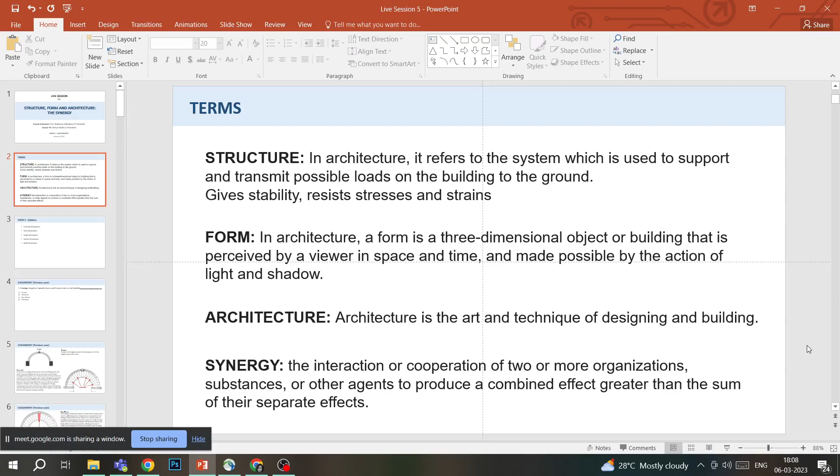So in week 5, the syllabus covered included frame structures, arch structures, vault structures, and dome structures.

Lecture number 21 was on frame structures. In this lecture, firstly the definition and introduction of frame structures was given. A frame structure is basically a combination of structural components like beam, column, and others, connected together to resist gravity and different lateral loads.

Then it was discussed how load is transferred in frame structures. Some examples were shown along with the kinds of materials used, such as RCC, steel, and composite. Then the different types of frame structures were discussed—mainly 2 types: rigid frame structure and braced frame structure. Examples were discussed, along with types of rigid and braced frame structures, and the advantages and disadvantages of each.

Moving on to lecture number 22, arch structures. The definition and introduction of arch were given: an arch is a curved structural form, it carries compressive load, and it is self-supporting. Then elements of arches were discussed, how load is transferred in arches, what materials are used to make arches, and examples from around the world, followed by the different types of arches.

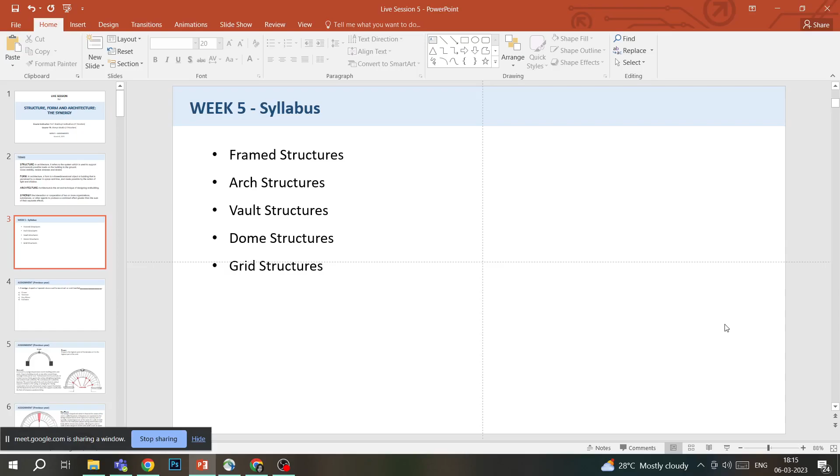And now we will start with our questions. So these are previous year questions, these are not this year questions. And we will start now. A wedge-shaped or tapered stone used to construct an arch is called crown, voussoir, keystone, or extrados. So these 4 terms, if you have studied the lecture, you would be familiar with these terms. If you've not, we'll just discuss these terms a little so that you can understand what these terms are and be able to answer this question.

So, what is a crown? A crown is basically the highest point of the extrados, or it is the highest part of the arch. So extrados here means the outer surface of an arch. Whenever there is an arch, it would be made of some material, and there would be two curvatures, one inside curvature and one outside curvature. So the outside curvature is called extrados, and in that extrados, the highest point is called crown.

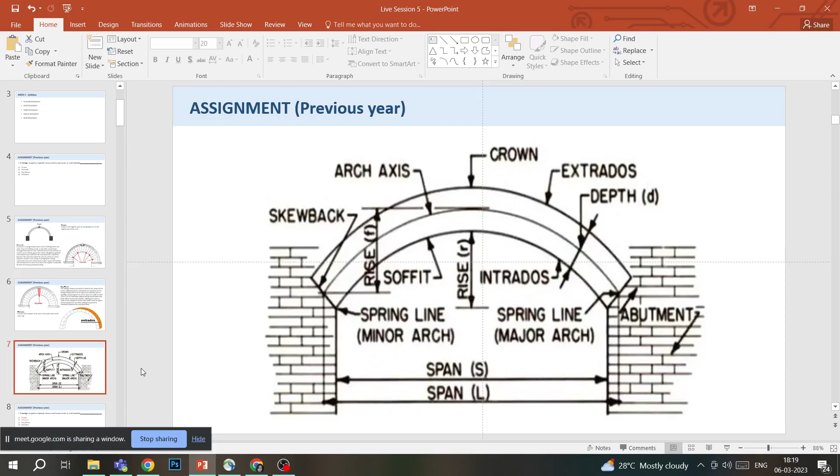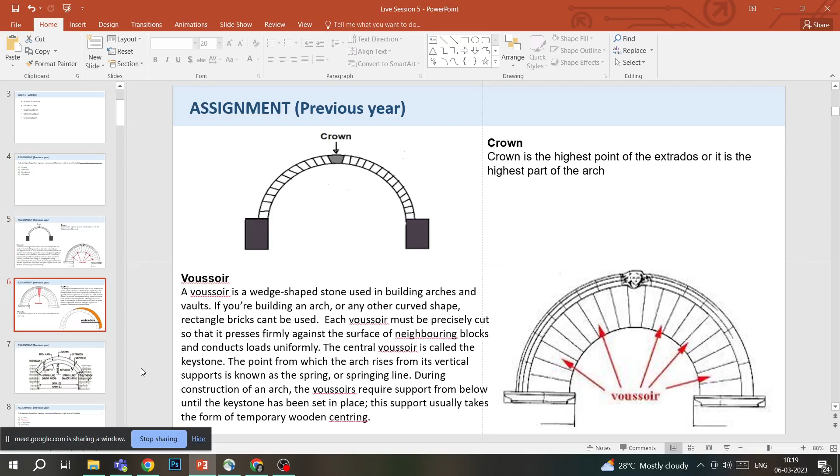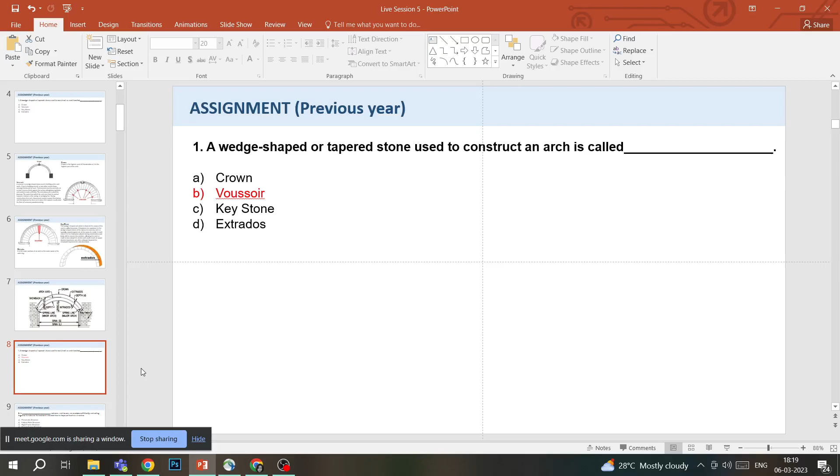So our question was, a wedge-shaped or tapered stone used to construct an arch is called, and as we just discussed all the four terms, the correct answer would be voussoir. All the wedge-shaped stones that are used in constructing an arch or a vault are called voussoirs. Keystone is the apex voussoir, center voussoir, and the voussoirs that are on both edges, sitting on the abutment, are called springers.

Moving forward, question number 2. In blank, columns and beams are made monolithically and act together to tolerate the moments created due to imposed load on the structure. And the four options that have been given are pneumatic structure, folded plate structure, rigid frame structure, and braced frame structure.

So pneumatic structure is a membrane structure that is stabilized by the pressure of compressed air. Pneumatic structures are characterized by slightly higher pressure of internal air above the outside pressure. These structures are supported by pressurized air within the inflated building elements that are shaped to carry loads in a traditional manner. The roof membrane of the pneumatic structure is made from rubber or reinforced film and ETFE foils sometimes, using industrial fabrics coated with polymers.

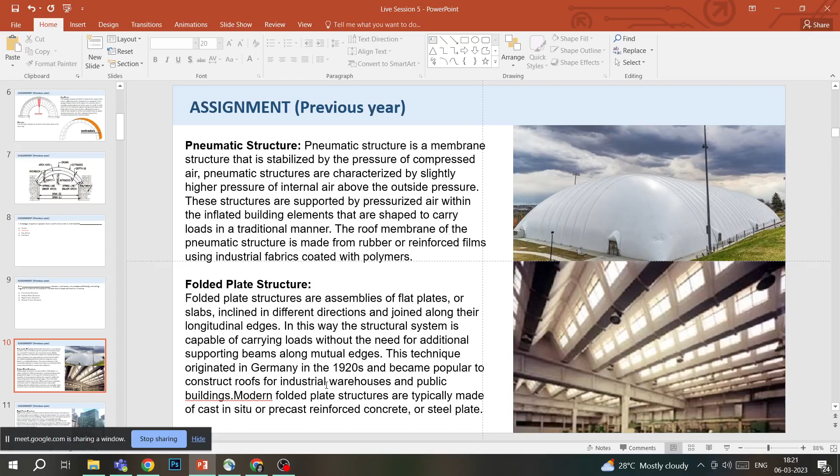Folded plate structure. Folded plate structures are assemblies of flat plates or slabs, and they are inclined in different directions, and then they are joined together along their longitudinal edges. In this way, the structural system is capable of carrying loads without the need for additional supporting beams along the mutual edges. This technique originated in Germany in the 1920s, and it has become quite popular, and it is being used to construct roofs for industrial warehouses and public buildings. And modern folded plate building structures are typically made of cast in situ or precast reinforced concrete or steel plates.

Rigid frame structure and braced frame structure. Rigid frame structure consists of linear elements like beams, columns, and the word rigid basically means the ability to resist the deformation. It is used in steel and reinforced concrete buildings. Rigid frames are characterized by the lack of pinned joints within the frame and are typically statically indeterminate. A rigid frame is capable of resisting both vertical and lateral loads by bending of beams and columns. And stiffness of the rigid frame is provided mainly by the bending rigidity of beams and columns that have rigid connections.

A braced frame structure. Braced frame structures are composed of beams and columns that are pin connected with bracing to resist lateral loads. So how is braced frame different than rigid frame? Rigid frame has no pin structures, while braced frame has pin structures; the columns and beams are pinned together with a bracing to resist the lateral loads. The resistance of lateral forces is obtained through both horizontal and vertical bracing.

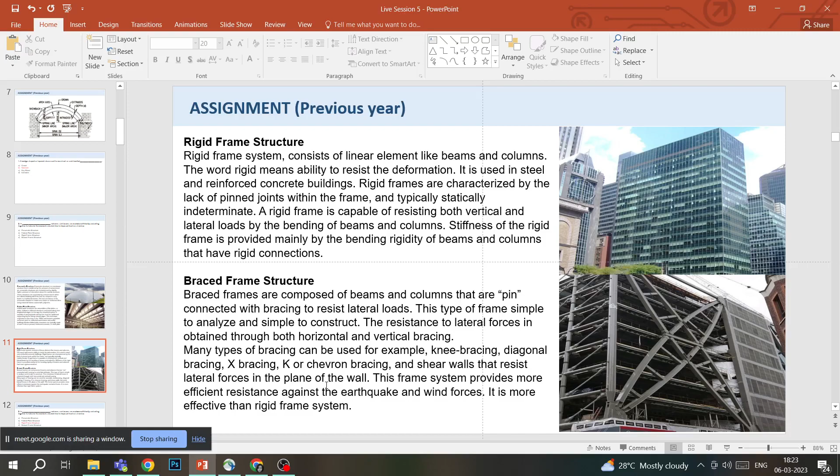So going back, our question was: in dash, columns and beams are made monolithically and acting together to tolerate the moments created due to the imposed load on structure. So pneumatic structure, as we have understood, works with the idea of compressed air, how the air is keeping the structure floated. So it is not pneumatic. Folded plate, we just learned that different plates are put together at an angle, so it is not that. And then we learned that in rigid frame, everything is fixed, everything is rigid, and in braced frame the column and beam joints are braced together and they're kind of pinned together. It is not a fixed joint. So our answer would be rigid frame.

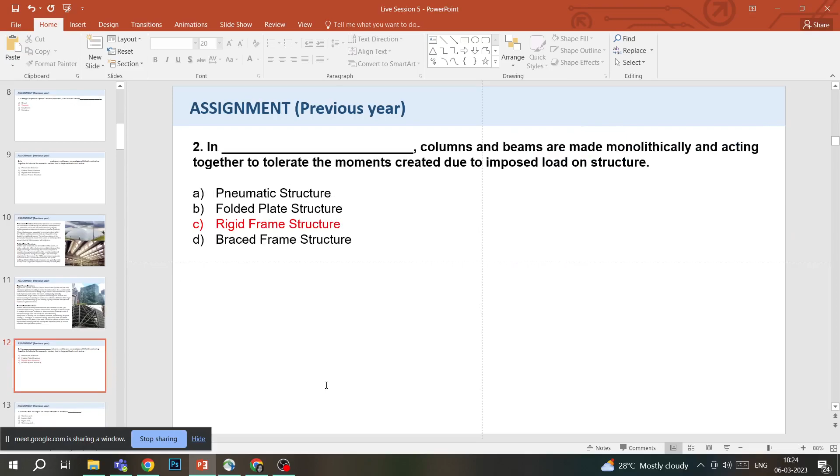Next question. An arch with a straight horizontal extrados is called as camber arch, lancet arch, ogee arch, or catenary arch. I'm not sure which is the correct pronunciation of ogee. So as we just learned in the first question, extrados is basically the outer curved surface of an arch. And now they are saying an arch with a straight horizontal extrados. This arch has a straight extrados, which means that it's an arch, but it's almost straight. It is not completely curved. It's a very slight curve. That's why it is called horizontal extrados. Now we will learn what all these four arches are to be able to answer this question.

Camber arch. Camber arch is an arch whose intrados, though apparently straight, has a slightly concave curve upward. So in camber arch the extrados is completely straight and the intrados is a very slight curve, almost straight but a very slight curve.

Lancet arch. So the lancet arch is a variety of pointed arch in which each of the arcs or curves of the arch have a radius longer than the width of the arch. So do you understand what that means? So basically they're saying that all arches that we draw, when you're constructing those arches, when you're preparing drawings of these arches, we all know they're made out of curves, different kinds of curves.

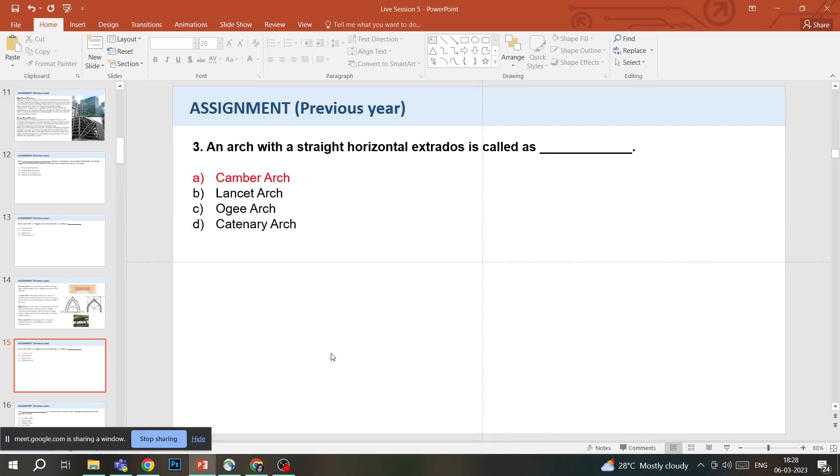Moving on to the next question. A dash is a continuous arched shape that may approximate a semi-cylinder in form. Annular vault, barrel vault, Catalan vault, and fan vault. So we will learn about all these types of vaults. Before we do that, the question asks that this kind of vault is a continuous arch shape that may look like a semi-cylinder in form.

So moving forward, annular vault is a barrel vault. So first we will discuss barrel vault so that we can understand annular vault. So barrel vault is a continuous arch shape that may approximate a semi-cylinder in form, resembling the roof of a tunnel, or may be pointed at its apex.

It is typically formed by a series of arches, and barrel vaults must be able to withstand the outward pressure on the lower parts of the vault imposed by the structure above. So barrel vaults are basically different arches placed in distance, and it creates a semi-cylindrical form.

And in an annular vault, it is a barrel vault but in the shape of a ring. So a barrel vault is basically different arches that are placed one after the other, and it creates a semi-cylinder kind of shape, but it is straight. And when that barrel vault is curved or it is a part of a ring, then it is called an annular vault. And I have shown you the example of both these vaults.

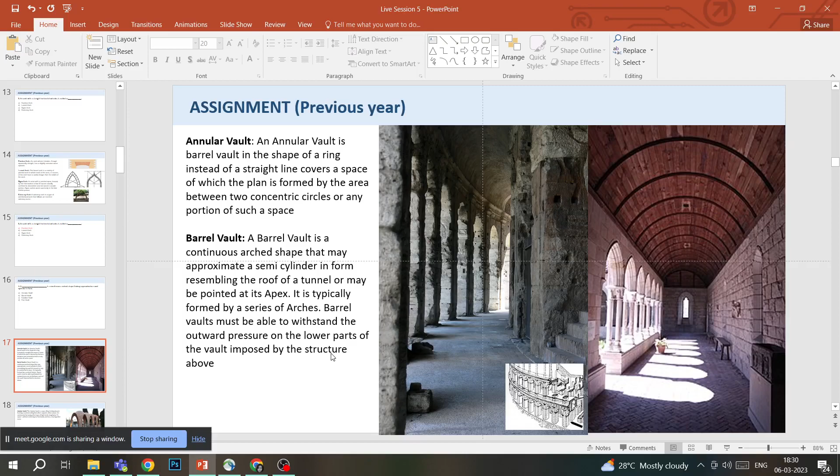For example, for this annular vault, a good example would be your Colosseum. So there is a tiny diagram over there in the first image, if you can see. So yeah, because the Colosseum is round shaped, it has annular vaults in it.

Catalan vault. So a Catalan vault is a type of low brickwork arch forming a vaulted ceiling that often supports a floor above. It is constructed by layering a first layer of light bricks lengthwise in space without centering nor formwork, and has a much gentler curve. It is basically a type of low brickwork arch forming a vaulted ceiling, and it usually supports the floor above.

Fan vault is formed by a series of concave sections or ribs that spread out from a series of spring points. The ribs of a fan vault are of equal curvature and rotated at equal distances around a central axis, and it was mostly used in Gothic architecture. So the answer is barrel vault.

Question number 5. The vault type used in the Great Mosque of Cordoba is barrel vault, cloister vault, rampant vault, rib vault. First we will learn what the Great Mosque of Cordoba looks like, and then we will learn all these 4 types of vaults, and then we can answer this question.

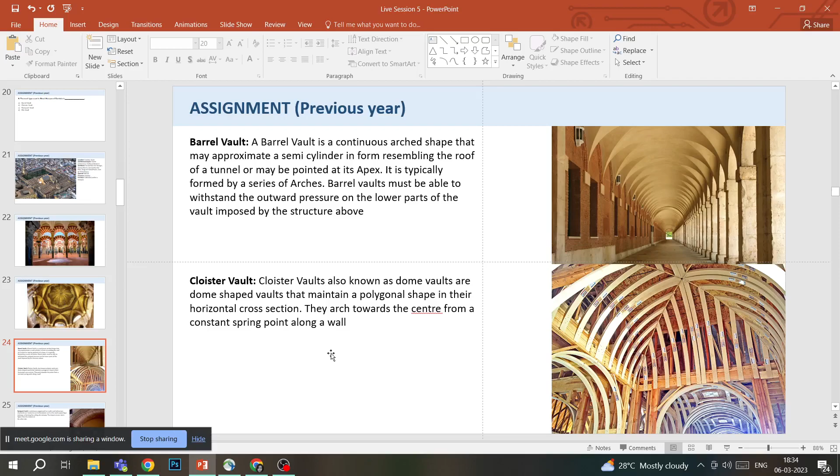Rampant vault. A rampant vault is a continuous wagon vault or cradle vault, whose two abutments are located on an inclined plane, such as the vault supporting a stairway or forming the ceiling of a stairway. The impost on one side is higher than the impost on the other side. So in a rampant vault, the two abutments are located on an inclined plane. For example, in a normal arch, the two abutments are in the same plane, but in a rampant vault, they are in different planes, which makes the arch form like a cradle, slightly elliptical in shape, usually used for supporting a stairway or forming the ceiling of a stairway.

Ribbed vault, or rib vault, is an architectural feature for covering a wide space, such as a church nave, composed of a framework. A church nave basically means that typical churches constructed have 3 rectangles in them. The central rectangle is called the nave, and there is a series of columns on each side, with two more corridor-like spaces after the columns, called aisles. So the central aisle is basically called the nave, and the rib vault is used for covering a wide space such as the church nave.

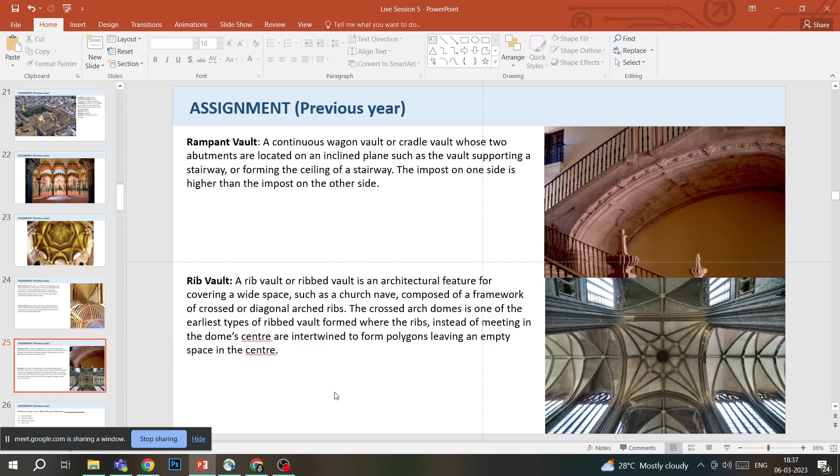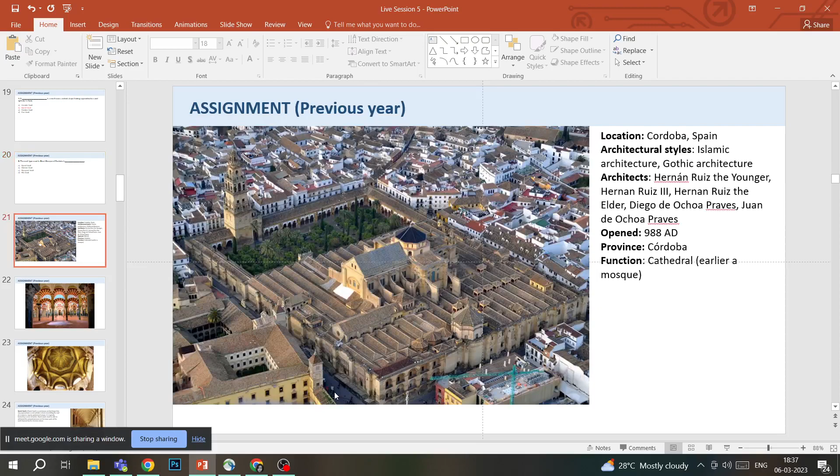So our question was: how do the arches of the Great Mosque of Cordoba look? Barrel vault, cloister vault, rampant vault, or ribbed vault? Looking at this image, you can see it is not a barrel vault, not a typical cloister vault, and not a rampant vault either. It is in fact a ribbed vault, because you can see different ribs coming out and forming polygons, leaving some space in the center, like the definition says. So the correct answer would be rib or ribbed vault.

Number 6: a dash is any building with a circular ground plan covered by a dome. The options are coffer, rotunda, squinch, and pendentive. We will learn what all these terms mean, and then we will be able to answer this question by understanding all four terms.

A coffer in architecture is a series of sunken panels in the shape of a square, rectangle, or octagon in a ceiling, soffit, or vault. It is basically a grid structure of sunken panels, which can be straight or curved.

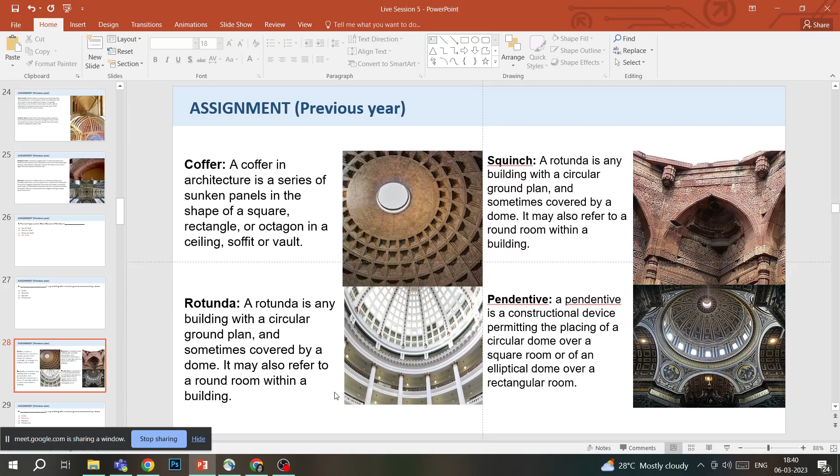So the correct answer is rotunda. Rotunda is any building with a circular ground plan covered by a dome. The biggest and most famous example of a rotunda is the Pantheon in Rome, which is a circular building with a dome over it, also has an oculus over it, and the dome has a coffered ceiling. So this is a big example of rotunda. Another famous rotunda is the Capitol complex in the US.

Moving on to the next question. Metropol Parasol in Spain is an appropriate example of: grid structure, arch structure, cable suspended tensile structure, or pneumatic structure. We will first see how Metropol Parasol looks like, learn some little facts about the building, and then see what all these kinds of structures mean and how they look like, and then solve this question.

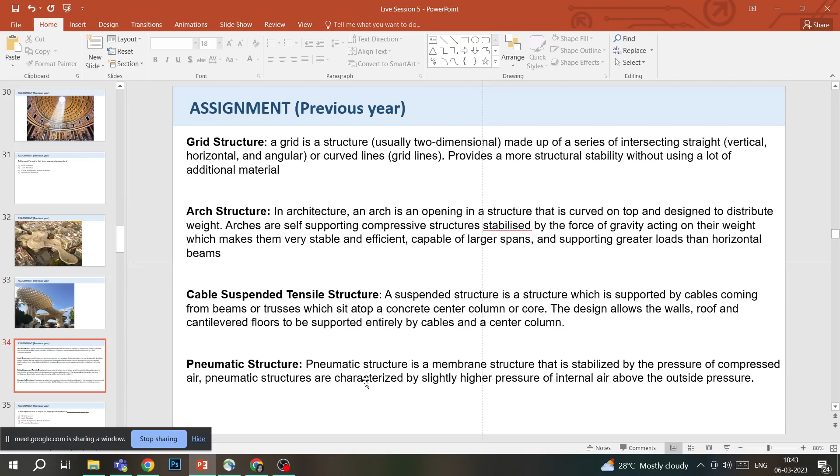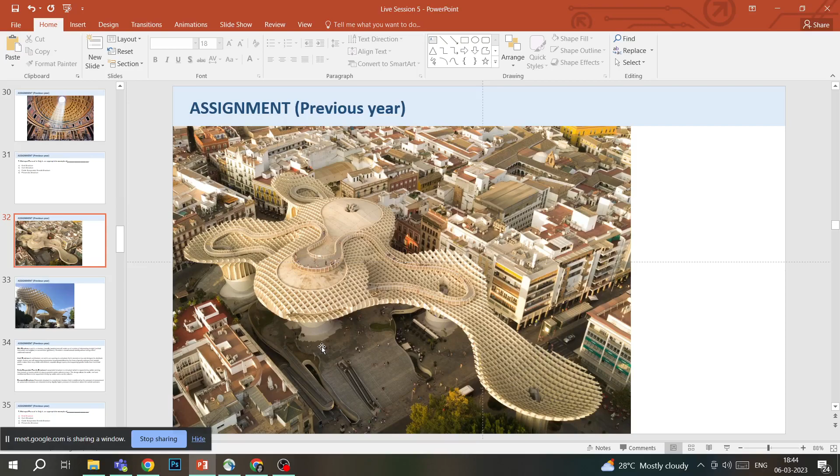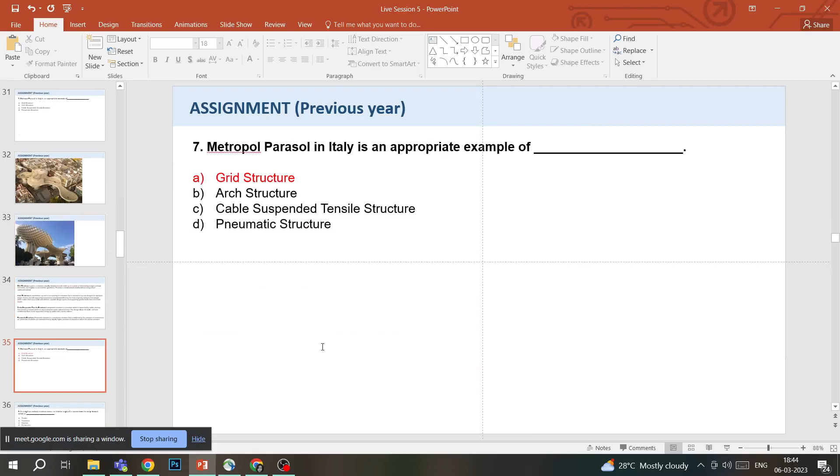So the question was how Metropol Parasol is an appropriate example of what type of structure. It's not an arch—if you can see, it's a curved structure, but it's not an arch. It is not a cable suspended tensile structure, and it is also not a pneumatic structure. As is very evident from the image, this is a grid structure—a curved grid structure, but still a grid structure. So our correct answer would be A, grid structure.

Question number 8: A straight or arch structure across an interior angle of a square tower to carry a dome is called as: oculus, tholobate, squinch, or pendentive.

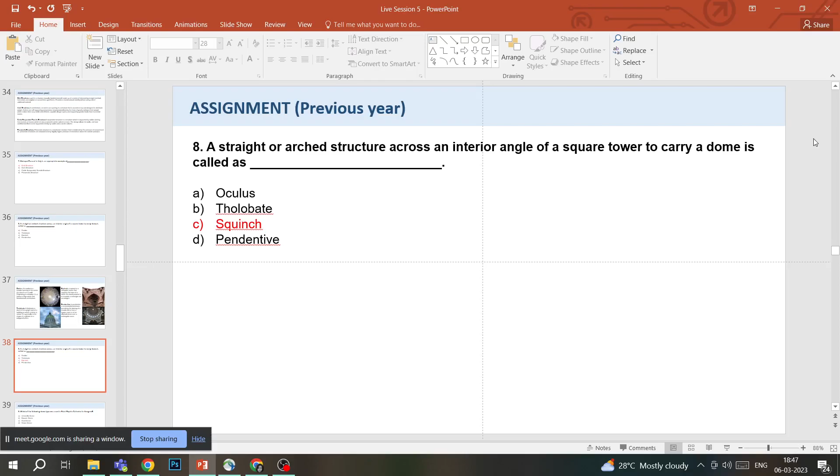Which of the following dome type was used in Saint Sophia Cathedral in Novgorod? Umbrella dome, saucer dome, oval dome, onion dome. First, we will learn a little about Saint Sophia Cathedral in Novgorod, and then we will learn how all these four domes look, and then we will answer this question.

It is a cathedral type structure, located in Kremlin Park, Novgorod Oblast, Russia. The architectural style is the architecture of Russia. It was opened in 1050 AD. Height is 38 meters, and there are 5 domes in this structure.

So the 4 types of domes mentioned in the question are umbrella dome, saucer dome, oval dome, and onion dome. We will just quickly see how all these 4 domes look.

Umbrella dome, also known as a ribbed dome, parachute dome, or scalloped dome. These kinds of domes are basically divided into curved segments that follow the elevation's curve. Radial lines of structure that act as the dome's ribs extend down the springing from the apex.

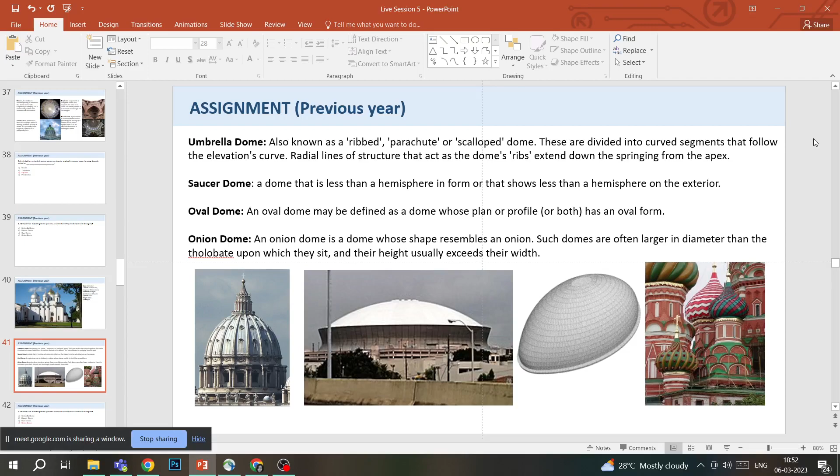Now going back to our question - which of the following dome type was used in Saint Sophia Cathedral in Novgorod. If you see this image clearly, you can see it's not an umbrella dome, it's not a saucer dome, it's not an oval dome - it is clearly an onion dome. So the answer would be onion dome.

So to be able to answer these kinds of questions, you have to be aware of how the buildings look, what their important features are, because only then would you be able to answer these questions if you know how these famous buildings look, what prominent features they have. If you know how they look, it would be easier to answer, because not always will a picture be given with a question.

Moving on. Which of the following buildings used diagrid structure for its construction? Burj Al Arab, Swiss Re 30 St Mary Axe, also called Gherkin. Gherkin is basically a name for pickles, cucumber pickles, and those pickles are elliptical or oval in shape, and the tower looks like that. That's why it's called a gherkin.

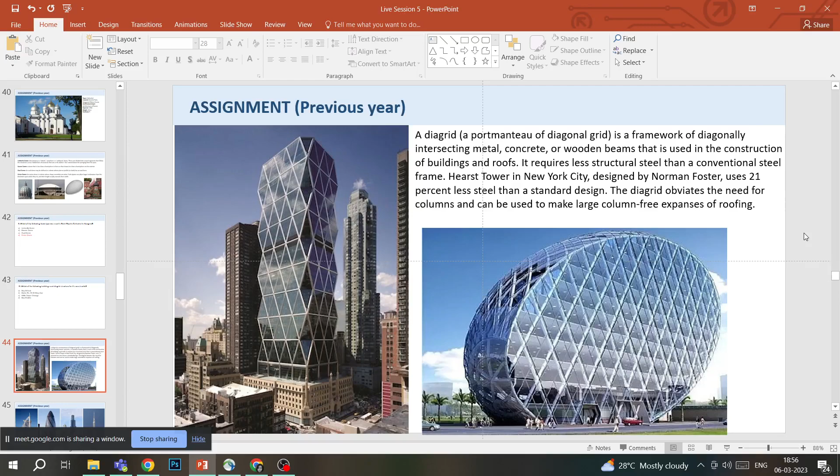So our question was, which of the following buildings uses diagrid structure for its construction, and four examples are given. Now we will see the four examples. Burj Al Arab, located in Dubai, is a very famous building there. Swiss Re 30 St Mary Axe, called Gherkin, is located in London. Willis Tower is located in Chicago, and Burj Khalifa is again in Dubai.

Actually, Burj Khalifa and Willis Tower use a bundled structure, and Burj Al Arab, if I'm not wrong, uses a braced structure because they have huge diagonal bracing in the structure. It is very evident that the Gherkin, the Swiss Re 30 St Mary Axe, is using a curved diagrid structure. So the correct answer would be B, Swiss Re 30 St Mary Axe, commonly called Gherkin.

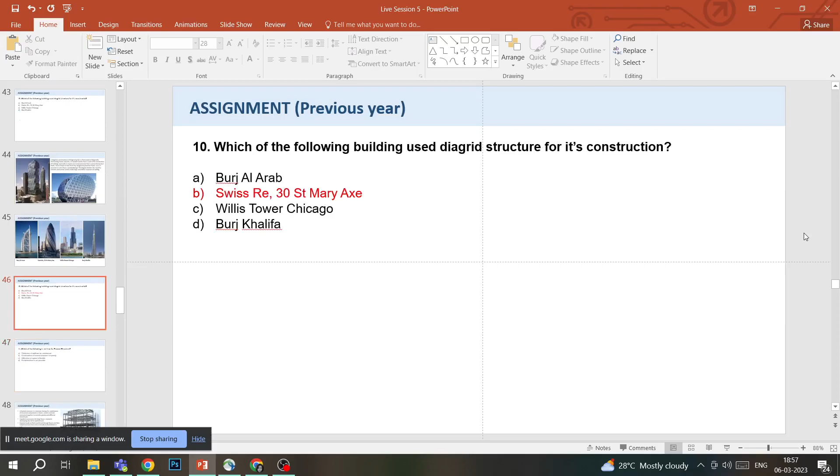Moving on to the next question. Which of the following is not true for frame structure? Thickness of wall can be maintained. Construction of framed structure is speedy. Utilization of space is flexible. Prefabrication is not possible. So the question is asking which of the following is not true for frame structure.

So we have to pick the sentence that is not true for a frame structure. We'll understand what a frame structure is a little here. It is a structure having the combination of structural components - beam, column, slab - connected together to resist gravity and different lateral loads. It is capable of overcoming large forces and moments developing due to applied loads. Imposed loads on the slab are transferred through the beam and then column to the lower floor and eventually to the foundation, to the soil. That's how load is transferred in frame structure.

So what happens in a frame structure is basically it's a very regular structure having a beam, column, and slab. It's a frame structure. We have framing and then we have the walls. It's not a load bearing structure, it's a framed structure.

The thickness of wall can be maintained uniform throughout, and a considerably thinner wall reduces dead load. Due to simple geometry, consisting of beam and column, construction of frame structure is speedy, and construction is speedy because the geometry is very simple. It has basic column and beam, in a very typical traditional form, so the construction is very speedy.

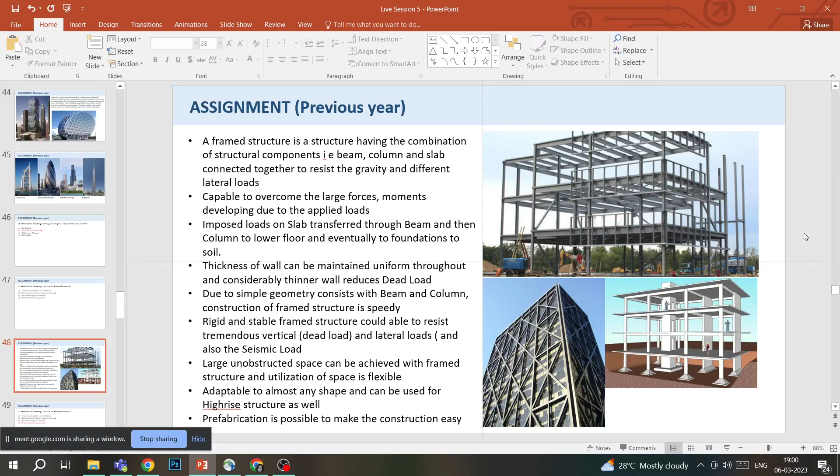So these are some of the facts about a framed structure. The question says, which of the following is not true for framed structure? Thickness of wall can be maintained, which is true. We can pick any kind of thickness of wall, and we also have the option of having thin walls, which reduces the dead load. Construction is speedy, which we just learned is true because framed structures have simple geometry, making them a little easier to construct.

Utilization of space is flexible. Yes, this is also true because we just learned that we can create large, column-free spaces with the help of a frame structure, which helps in making the space more flexible and utilized in a better way. So this statement is also true. Prefabrication is not possible - this statement is not true, because we just learned that prefabrication is also possible in frame structures, and it makes construction very speedy and easy. So the correct answer would be prefabrication is not possible, option D.

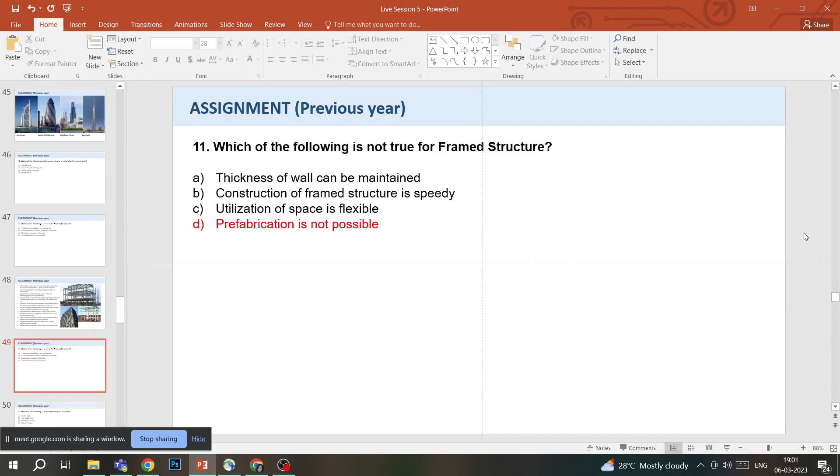Moving on to the next question. Which of the following is an example of grid structure? Coffer slab, funicular arch, geodesic dome, and space frame. We will see what all these four terms are, and we already know what a grid structure is.

A grid structure is basically any kind of structure which has intersecting lines. The lines can be straight, the lines can be curved, the lines can be in horizontal, vertical, or angular directions. So we will just see what these four types are.

Coffer slab: a coffered slab is a ribbed structure with reinforced ribs in the lower zone which have a mutually perpendicular arrangement.

Funicular arch: funicular structures include parabolic arches, tunnel vaults, and domes. They act in pure compression and have a rise-to-span ratio ranging from 1:10 to 1:2. Rise to span means the highest point of the arch compared to the width of the arch, which is the span - the ratio could vary from 1:10 to 1:2. Other kinds of funicular structures are parabolic arches, tunnel vaults, and domes, which act in pure compression.

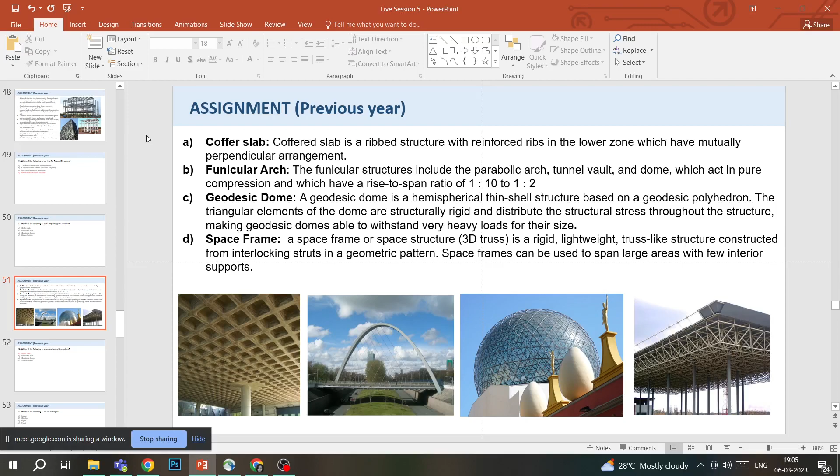I will have to confirm this, and I will research it a little and clear it out in the next session. Meanwhile, the correct answer is coffer slab - it is a grid ribbed structure.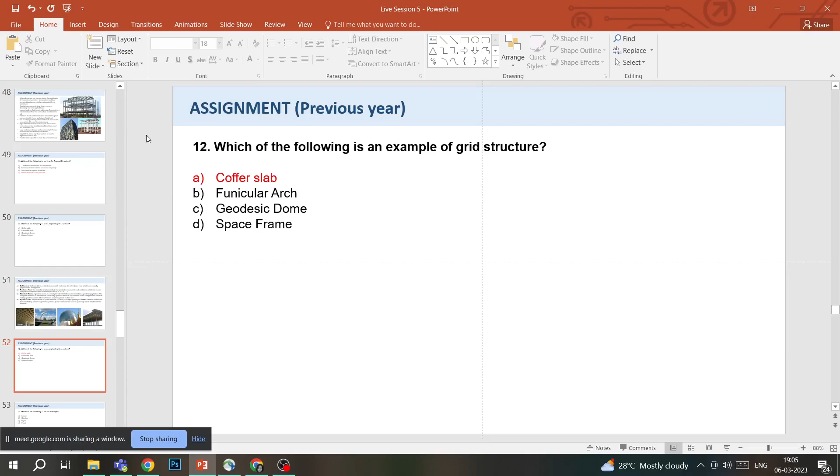Camber arch is an arch whose intrados, though apparently straight, has a slightly concave curve upward, and the extrados in a camber arch is completely straight. So the question is basically which of these following is not an arch type. And then lancet is also an arch, and I have just discussed all these arches.

The lancet arch is a variety of pointed arch in which each of the arcs or curves of the arch have a radius longer than the width of the arch. Ogee arch will have a pointed apex formed by the intersection of two S curves, usually confined to decoration and not used in arcade arches. Ogee arches were used only in the late Gothic period.

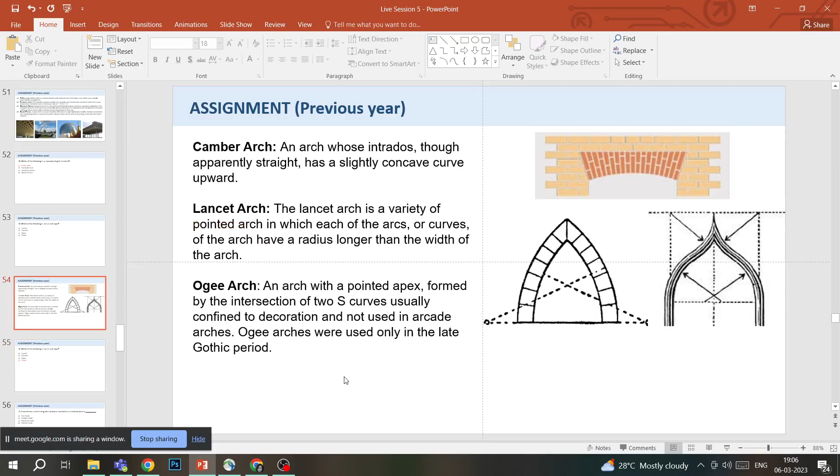And focal points are basically where the curves of the arches originate. So of course focal is not an arch, another three are arches. So the correct answer is focal.

Question number 14. A continuous vault having two abutments located on an inclined plane is fan vault, Catalan vault, rampant vault, cloister vault. So, Catalan vault is a type of low brickwork arch forming a vaulted ceiling that often supports a floor above. It is constructed by layering a first layer of light brick lengthwise in space without centering or formwork and has a much gentler curve.

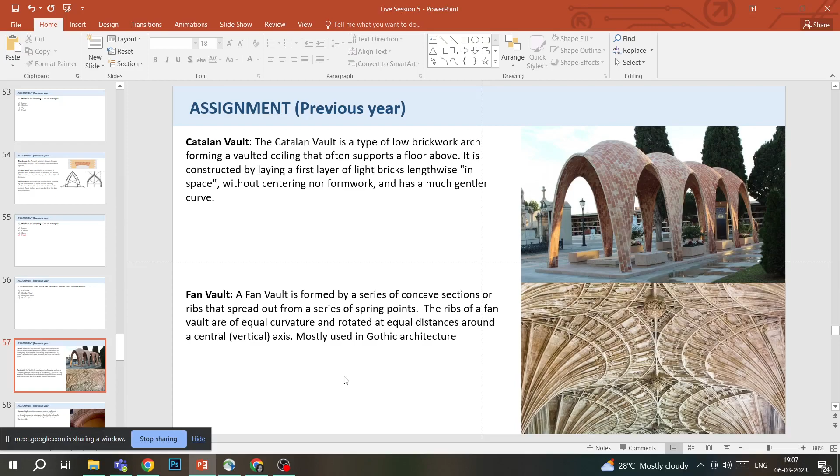A fan vault is formed by a series of concave sections or ribs that spread out from a series of spring points. The ribs of a fan vault are of equal curvature and rotated at equal distances around a central axis. It is mostly used in Gothic architecture.

Rampant vault is also called a wagon vault or a cradle vault, and the two abutments are located on an inclined plane, such as the vault supporting a stairway or forming the ceiling of a stairway. The impost on one side is higher than the impost on the other side.

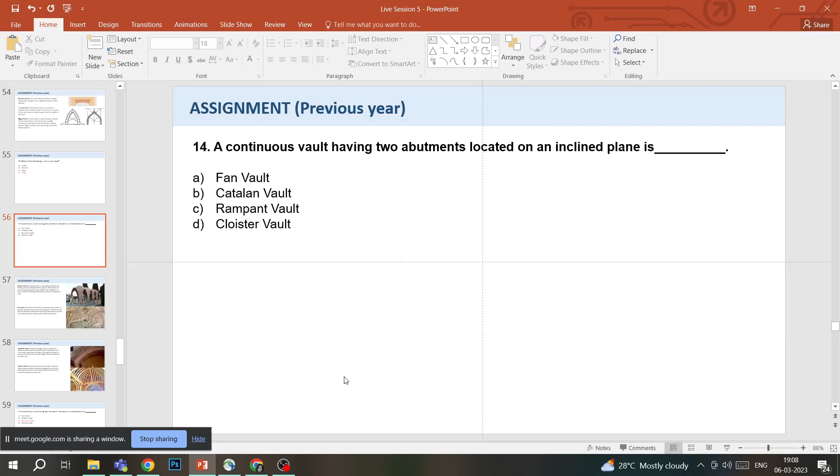Cloister vaults, also known as dome vaults, are dome-shaped vaults that maintain a polygonal shape in their horizontal cross section. They arch towards the center from a constant spring point along a wall. So the question was that a continuous vault having two abutments located at an inclined plane is fan vault, Catalan vault, rampant vault, or cloister vault. So our answer would be rampant vault.

Meridional stress developed on a dome is dash in nature: compressive, tension, bending, or shear. So we are talking about meridional stresses. So any kind of dome, when it is analyzed, it is concerned with two stresses: the stresses that are acting in the meridional direction, that is the meridian of a dome, and the stress that is acting in the parallel direction of hoop.

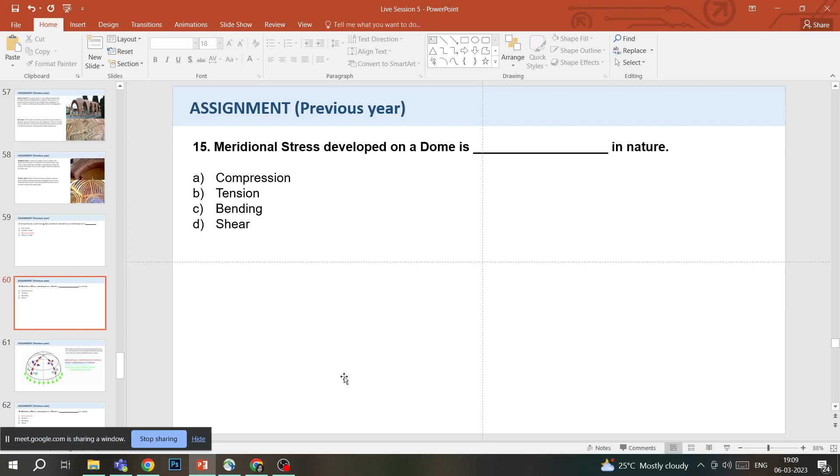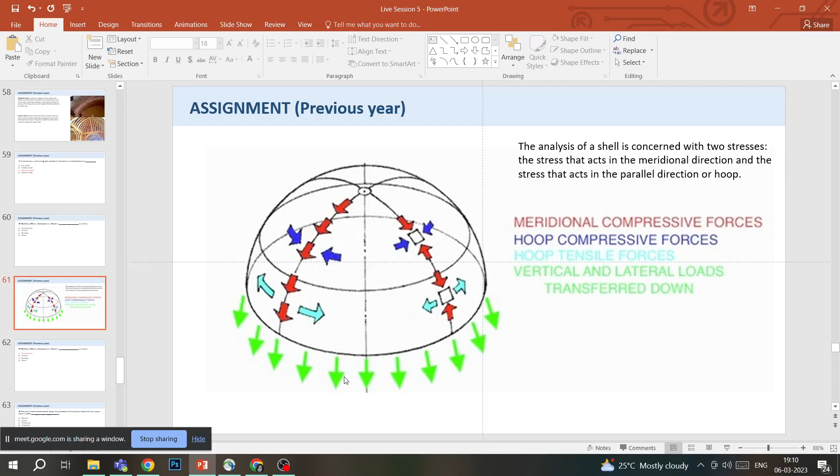Hoop is the circumference of the dome, and the parallels are called hoops. So in a dome, along the meridians, only compressive forces or compressive stresses act. Along the hoops, compressive forces also act and tensile forces also act. So the meridional stress developed on a dome is compressive in nature because meridians only have compressive force. Hoops have compressive as well as tensile forces.

Question number 16. The constructive device which allows the placement of the circular dome over the square room is called squinch, oculus, pendentive, tholobate. We have covered all those four terms. We will again cover it for a while, and I think the definition of squinch here is again wrong. I'm sorry for the mistake.

So oculus is the circular opening in the center of a dome or in the wall. Originating in antiquity, it is a feature of Byzantine and neoclassical architecture. Tholobate, not Theobald, tholobate or drum is the upright part of a building on which a dome is raised. It is generally in the shape of a cylinder or a polygonal prism.

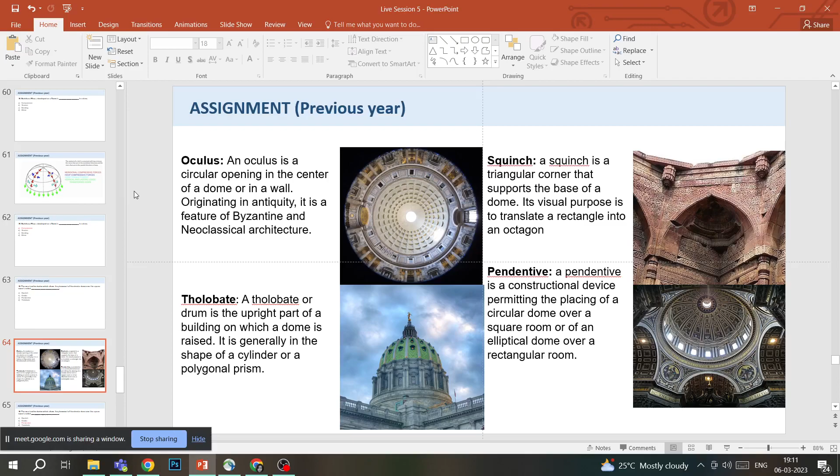Squinch is a triangular corner that supports the base of a dome. Its visual purpose is to translate a rectangle into an octagon. Pendentive is a constructional device permitting the placing of a circular dome over a square room or an elliptical dome over a rectangular room. So the question was the constructive device which allows the placement of the circular dome over the square room is called squinch, oculus, pendentive, or tholobate.

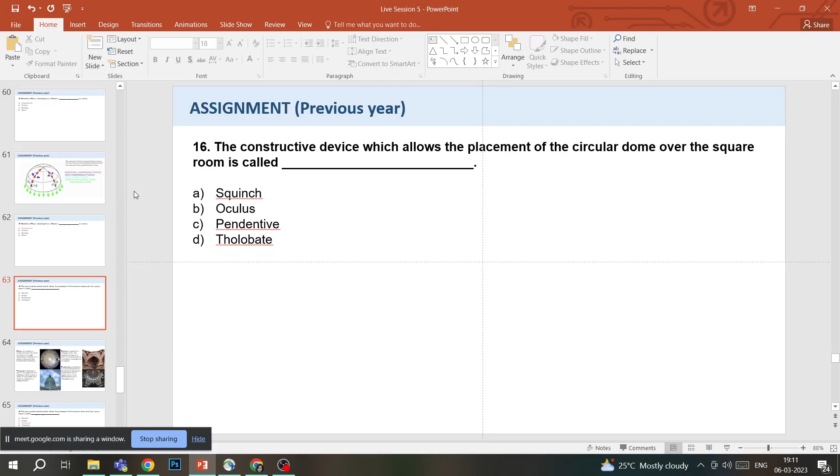So roller supports are free to rotate and translate along the surface. I covered this part in live session 3; I'm just covering it again. Roller supports are free to rotate and translate along the surface upon which the roller rests. Roller supports are commonly located at one end of long bridges. This allows the bridge structure to expand and contract with temperature changes.

The expansion forces could fracture the supports at the banks if the bridge structure was locked in place or if it was fixed. Roller supports can also take the form of rubber bearings, rockers, or a set of gears, which are designed to allow a limited amount of lateral movement. So basically in the roller support, it is allowed to have movement. It is not fixed.

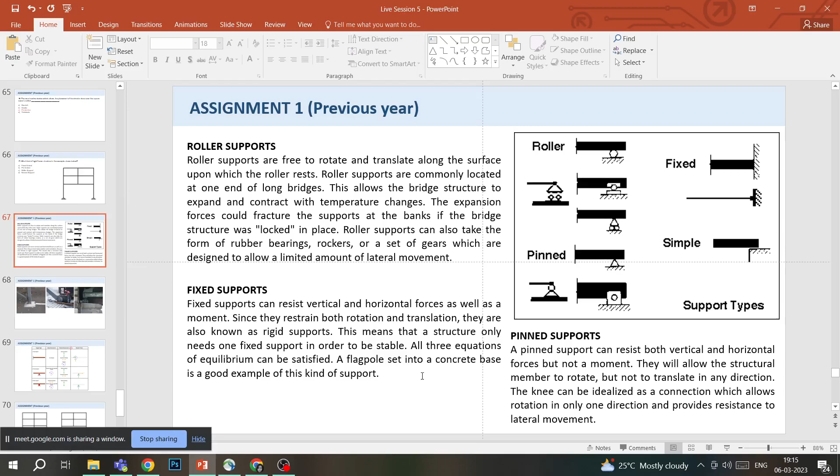In roller support, it can move sideways, it cannot go up, and it cannot rotate. It can just move in this direction. In pinned support, it can rotate, but it cannot move in this direction or in this direction. In fixed support, it is not moving in this direction or this direction, and it is not even rotating. And how we showcase these supports: roller is shown with a base and then a circle resembling a bearing. In pinned, usually there is a base and then a triangle to show the pin. Fixed, usually there is a base and then the structure directly starts.

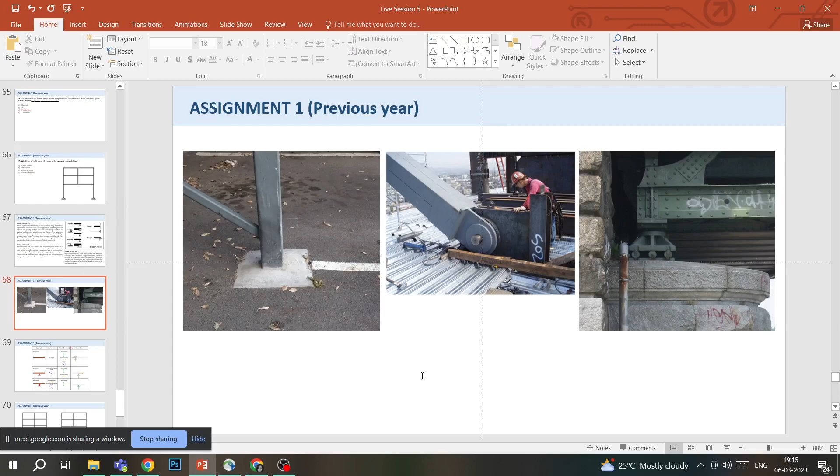So these are some of the examples. The first one is a fixed support. It is just fixed there. The second one is a pinned support. It is located with a pin, so it can have a little rotational movement. Third is a roller, so that it can translate a little here and there if it needs to. So this was another diagram showing in which direction movement is allowed and what all is restricted.

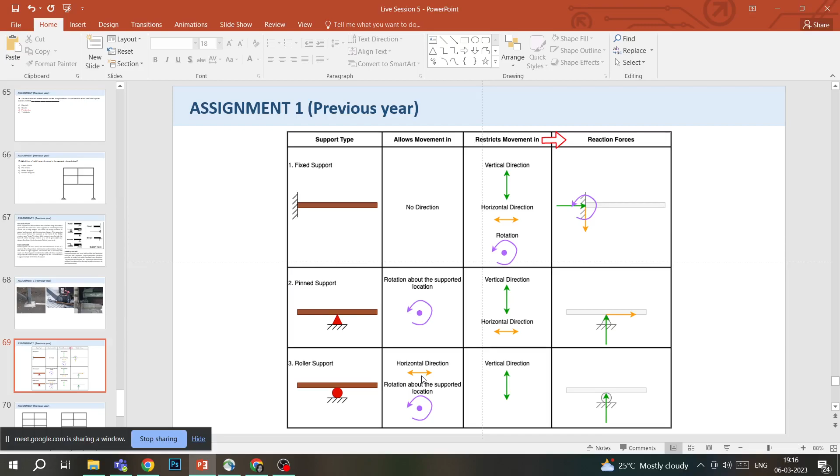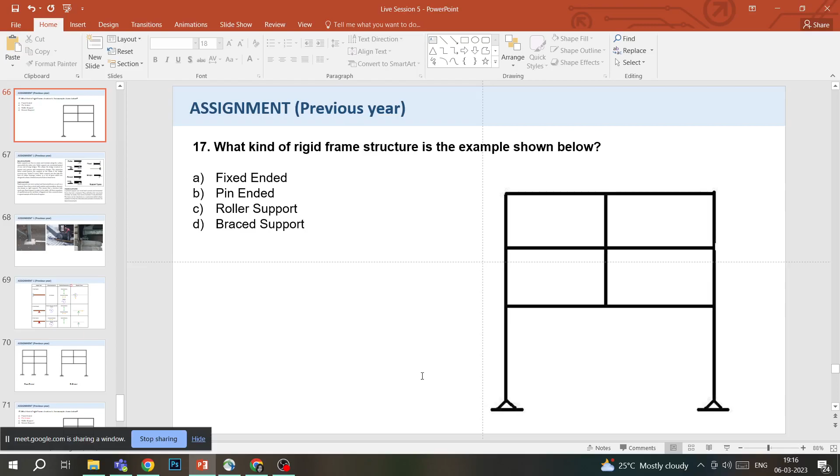So now our question was what kind of rigid frame structure is the example shown below. As you can clearly see, we just learned that for pin the symbol of a triangle is used, for roller the symbol of a circle is used. I'm not sure what symbol is used for braced support, and for fixed it is directly put on the ground. So our correct answer would be pin ended.